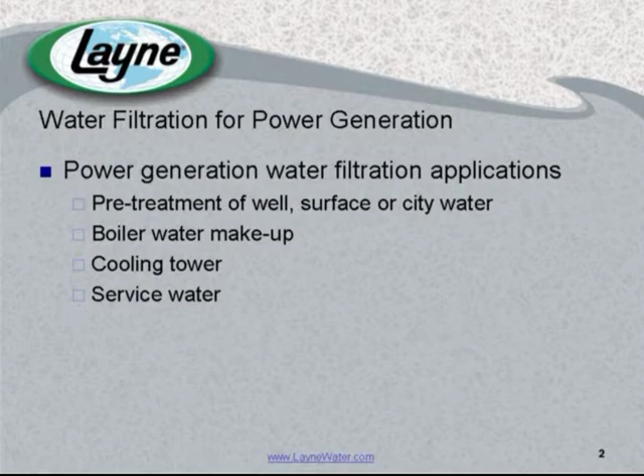In some plants, let's talk about, again, traditional coal-fired, you might be looking at things such as flue gas desulfurization, ash handling, coal pile runoff. In a combined cycle and a gas turbine facility, you could be looking at air inlet fogging or cooling, which will require a pretty high quality of water, akin to boiler feed water. And then in some facilities you might even have a wastewater disposal system that will use different types of filtration.

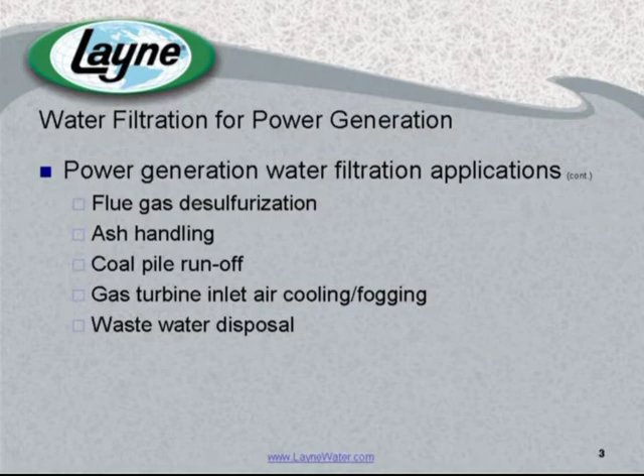So when you're going to spec out a filtration mechanism or system in your power generation facility, there's really a handful of key things you really need to consider right up front. Those would be the quality of the water that's coming into your filtration process. Second would be, how pure do you need it when it comes out the end of your process? So process inlet and outlet need to be considered.

Flow rates, footprints. You can get some filtration systems that require a very, very large filtration system. Let's talk about a traditional gravity sand filter as an example. Or you can get some things that are pretty small. A packaged reverse osmosis or ultrafiltration system can be squeezed down to a pretty small footprint. And of course, you're always going to want to look at overall capital cost and then long-term operating cost.

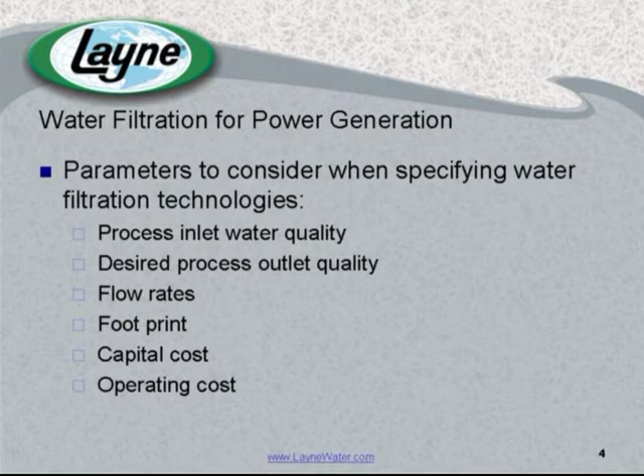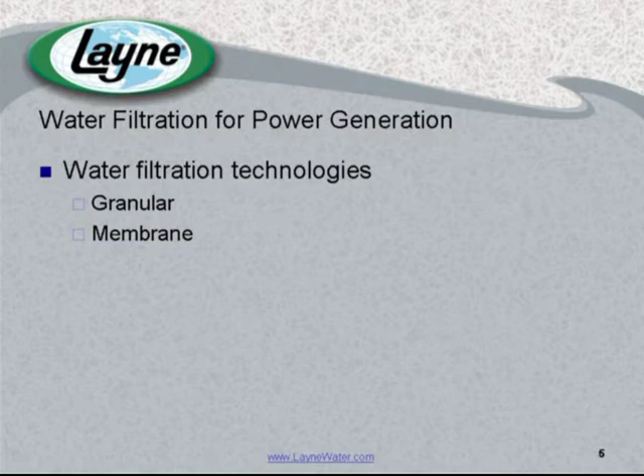So, filtration. There's really two major categories, granular and membrane. Now your granular filtration is kind of the old school style. We're talking about sand, anthracite, maybe garnet, activated carbon, things of that nature. Those can either be gravity fed or could be pressure filters depending upon the application and the requirements that you're looking at. These are pretty good filters and serve the industry very, very well for hundreds of years.

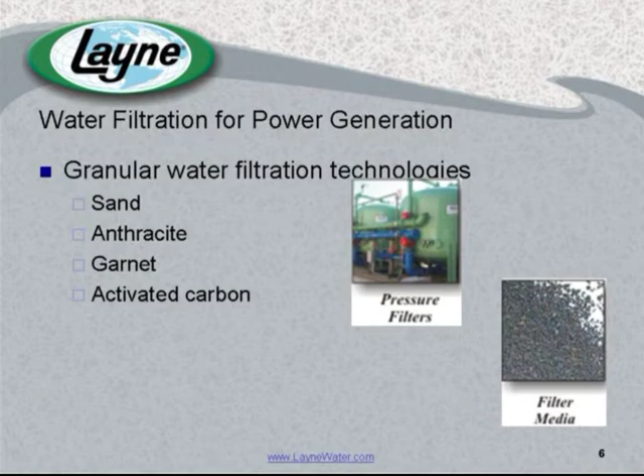But if you're really looking at maximizing the purity of the water leaving your filtration process, you're probably going to be moving into one of the more modern technologies, one of the membrane filtration technologies, such as microfiltration, ultrafiltration, or nanofiltration. At the upper end of that membrane technology resides reverse osmosis. And by the time you reach reverse osmosis, you're almost leaving the spectrum of true filtration because you're moving into something that can actually separate at the molecular level and is really a demineralization process, although it's usually lumped into filtration. That's why we have it listed here.

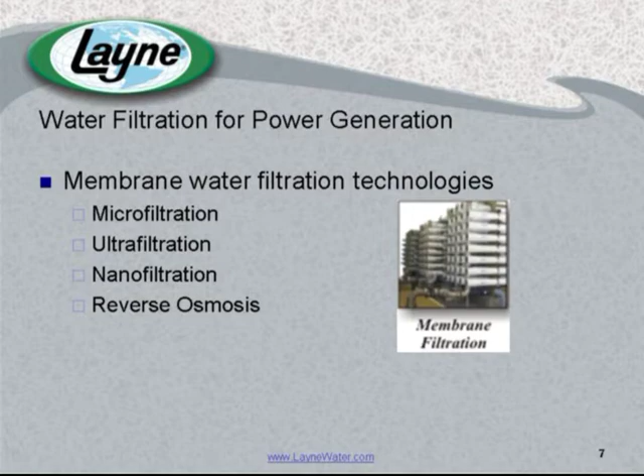But on slide 8 we have a filtration operation comparison guide that shows the filtration capabilities in terms of how small of a particle can be removed by the various types of filtration mediums, going all the way from a coarse sand all the way through reverse osmosis. When you look at this chart, a couple things will become apparent, and that is, one, that reverse osmosis is by far the most efficient filtration mechanism, and two, that most of the filtration mediums overlap in terms of efficiency on some pretty broad levels.

So when you're looking at what filter mechanism to choose and what style of filter, you really need to look at all of the other parameters we mentioned in regards to what size footprint do you have available to you, capital cost, operating cost, inlet water quality variations and things like that, because that's really going to drive your decision as to which way you turn.

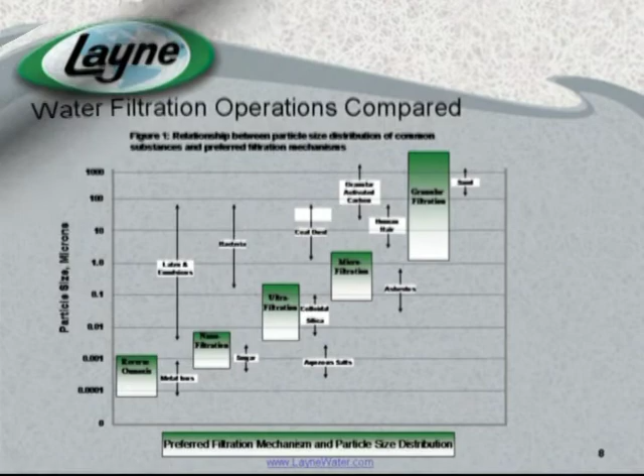So if you think about kind of old school granular filtration, that operates on the principle of what is known as dead end water filtration. And in dead end water filtration, you are passing a liquid, in this case water, through a filter media, and what's coming out the other side of that filter is the filtered water. What is remaining in the filter medium is the dirt, particulate, and contaminant.

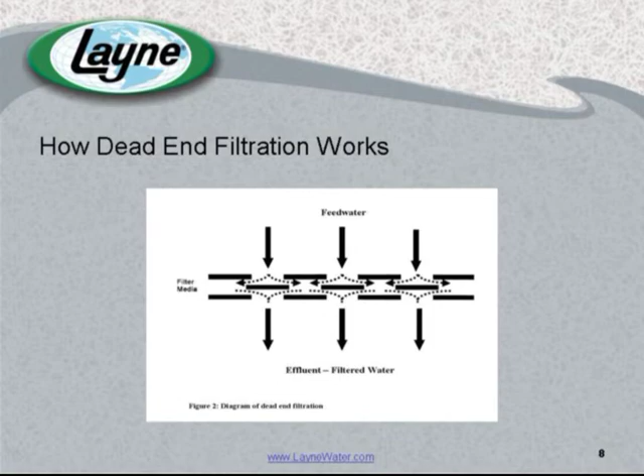Now that is in contrast to something such as ultrafiltration or reverse osmosis, where in most cases you're using what is known as a cross-flow water filtration mechanism, where the water that is being treated or filtered is going alongside a filtration mechanism or filtration medium, and the clean water or the permeate is passing through the wall of the membrane and being separated into actually three different streams.

You have your inlet water stream, you have your reject water stream, which has the concentrated impurities in it, and then you have your clean water stream, which is the filtered water, the permeate, other terms used to describe that. So again, basic difference: in your classic dead end filtration, you have an inlet stream and an outlet stream. That's it. In a cross-flow filtration system, you have an inlet water feed, you have a reject water feed, and you have a filtered water or permeate feed.